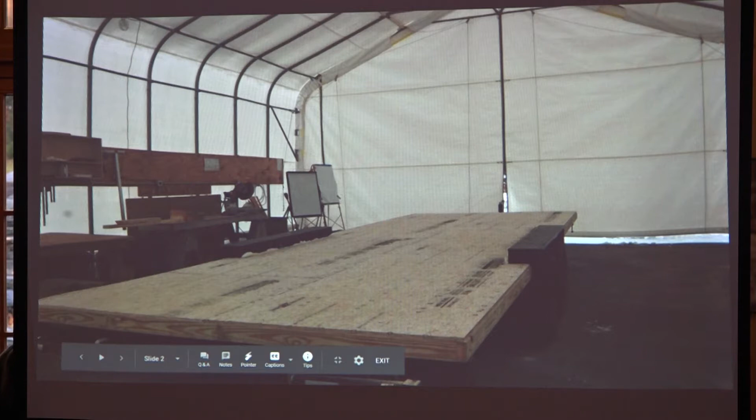And especially here in New England, where we're experiencing extreme weather conditions outside and trying to maintain a comfortable environment inside, we have this transfer of warm and cold meeting one another and creating condensation on some of these solid surfaces. So we do our best to insulate to try to separate those two environments.

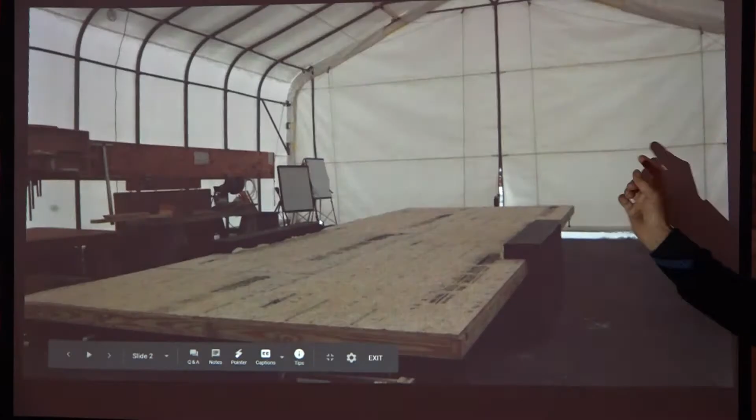This is a trailer of a most recent project that we did that was, in my opinion, very well designed to support a tiny house, based on the way that this flange, I don't really have a cursor, this flange is going to support our wall system all the way around the building. There's a 5.5-inch cavity that we put a pressure-treated floor system in, and we used a rock wool insulation that is capable of handling moisture, because it's going to get in there. There's really no way to keep it out.

It's a natural occurrence. So we try to think through this process, trying to keep as much water out as we can with flashing and adhesives, so on and so forth. But we also have to plan that just being in the environment, being in the atmosphere, you're going to experience some condensation. So we like to use materials that are able to deal with that moisture and allow it to release over time and won't create things like mold.

Real quick, one fun fact I like to throw at people about what it means to build on a trailer. What's the first thing that a tiny house on a trailer will experience the day it's born? Like a half-hour earthquake and a half-hour hurricane, right? Because that thing is traveling down the road. That's asking a lot of a building.

And there are often going to be considerations not only in the trailer itself, but in the whole structure, that are going to look atypical to what we think of when we build houses that aren't built on trailers. So I want to plant that seed: get ready to forget everything you thought you knew about building, because we're on a trailer now. Yeah, what's up next?

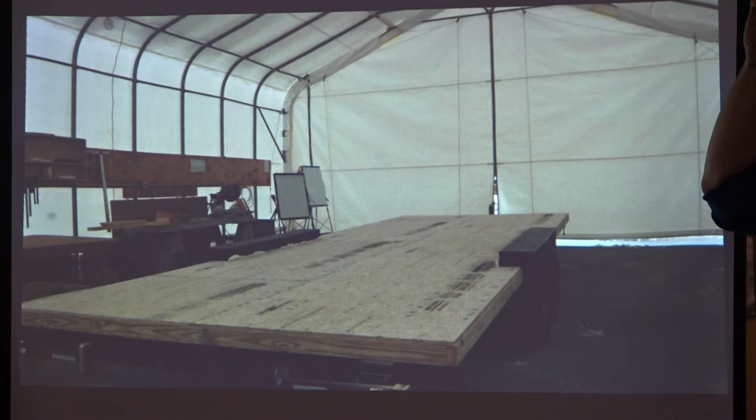So before we start building and just putting our wall directly on that thing that has minus 14 degrees on the underside of it, maybe we build, like we saw in the first slide, a deck right on top. Can you zip back real quick? Yeah. See, and there's one of those square fenders I was telling you about. But by building this up, we have broken the thermal bridge. There's a lot of framing in there for sure, which isn't stellar if that's your goal. But it's more than nothing, and nothing did not do much for us. So on top of that, we'd be framing up our wall, and now we have a little bit more of a thermal break.

Now, one thing I wanted to point out: this trailer sat outside. Although it was brand new and hadn't been built on yet, it sat out for a little bit. People were storing some things on it and it got a few scratches. Get yourself a can of Rust-Oleum and go around and hit up those little scratches, because that moisture over time is going to get in there. It will create rust and it will rot from the inside out if you're not careful. So spend a few minutes with a spray can, cover anywhere we marked it up with a little spray paint, and you can continue on with your building.

One of the things that was unique about this trailer is that our floor system could sit completely inside the trailer, be insulated, and bolted through these little holes you see on the side to the tube steel, making that floor structure completely connected all the way around to our trailer. Our flange system was separate, but we included that same styrofoam layer up the sides.

No, I guess I didn't capture that.

So it's just simply a thermal break. You're going to get wind and air flowing underneath your trailer, so it's important that you try to put as much insulation in there as possible. In this case, we had 5.5 inches of space.

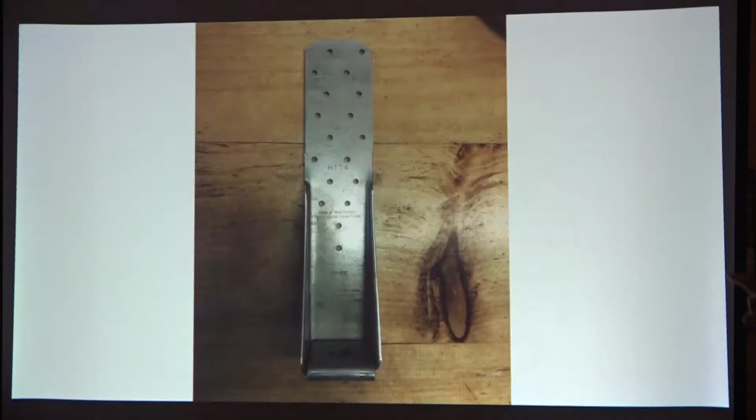One of the things about building around these fenders is that on your typical house, you have a bottom plate and a top plate tying to your foundation, which ties the wall to your top plate, which holds onto your rafters, and so on. They all overlap one another. When you have to build around these fenders, you are interrupting that bottom plate and the structural integrity of the bottom of that wall. So you have to plan ahead for that.

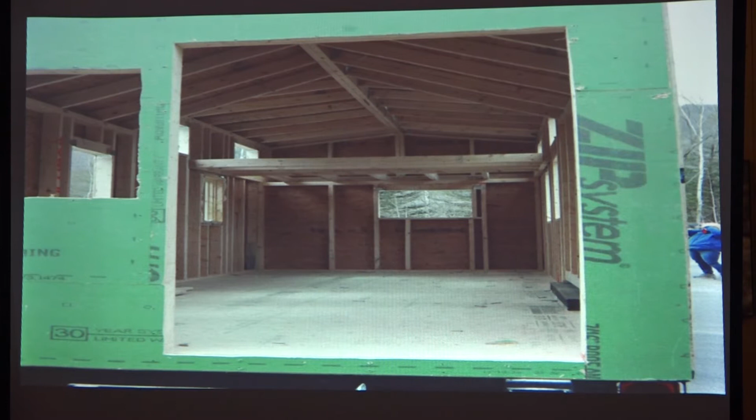Where we make that break, you can see in this slide, we've put in a header, which supports the weight of the rafter structure above, because we can't build off those fenders. Those aren't structural. They're there to keep water from blowing up into your structure, protecting whatever you have on that trailer. So we're not putting any weight on there, we're just building around it. We carry that weight over top of the fender, and then we use some really sexy components to connect your walls to this trailer.

This is a Simpson HTT4 hold-down bracket. It's pretty basic, only about 20 bucks. We put 1 in all 4 corners, and then 1 on each side of the fender, so actually 8 in every trailer. We'll drill a hole through the floor system, through the trailer.

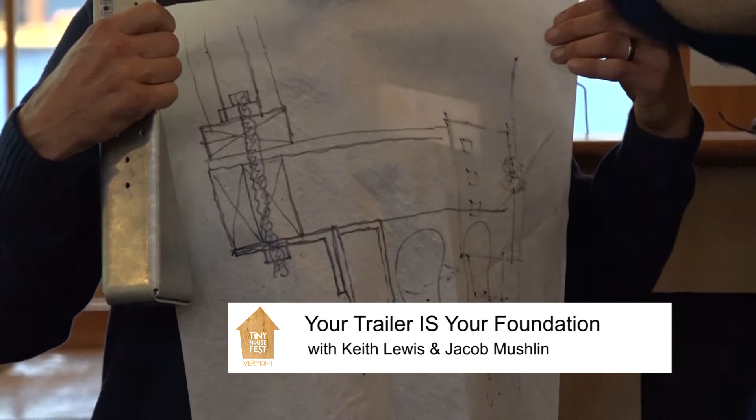There we go. So way over here, that's the flange we were talking about, that L of metal that hangs out into space. This rectangle is that rigid 2x5 tube steel. That's really the structural integrity of the frame itself. Built on top of that is the deck that we frame on. That's so when it's minus 15 degrees out here, that cold has a little more of a path to take before it gets into living space up here.

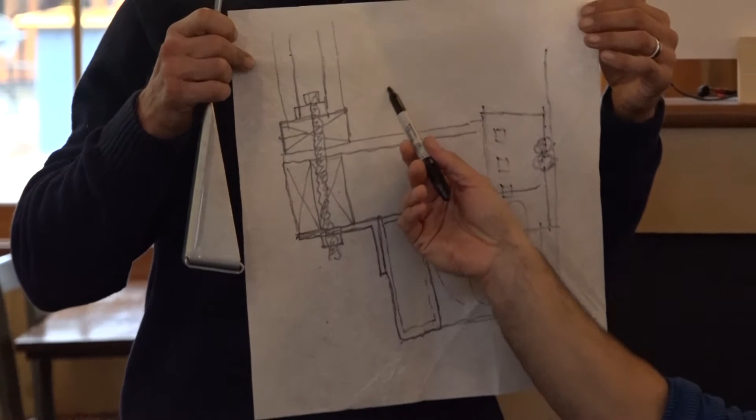Does that make sense? Now on top of that, just like any old platform, we're framing with a bottom plate like Keith said, and there's a stud. And this handsome devil right here is that piece of metal. You can see it has a bolt through a hole that goes all the livelong day, even through that flange. And now you have what we'd call a very positive connection between the walls of your building, the floor of your building, and the foundation of your building, which in this case happens to be a trailer.

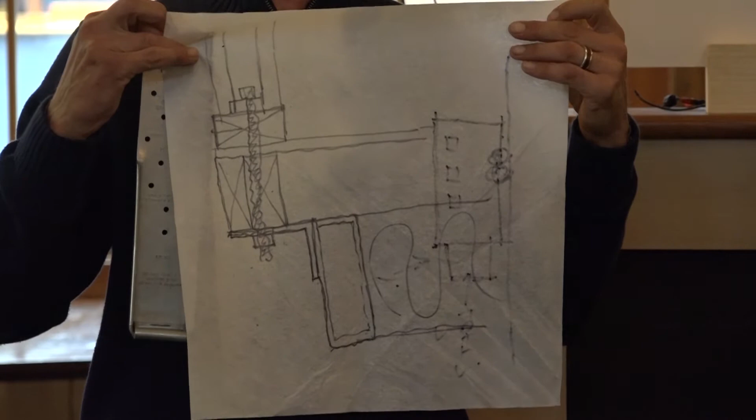Yeah, it's pretty sweet. What do you call that piece again? This is called a hold-down bracket or a tie-down bracket. So Simpson is a company that makes all sorts of different kinds of hangers and fasteners to help us connect wood to wood or wood to other metal components. And what that's doing is giving us more connection between our wood members and our trailer.

What I like to call it is really sleep insurance, because as I build for other people, these are the types of things I worry about. So going back to what Jacob said, your building, as you move it from site to site, is experiencing both hurricane and earthquake conditions. So if you're driving 65 miles an hour down the expressway and you have a headwind of 65 and you get a gust of wind of 40 miles an hour, you're somewhere between a Category 1 and a Category 2 hurricane. I see there's a question here.

So the question that was asked was how much insulation did we put underneath our wood floor deck system? We only used a 1/2 inch for a thermal break. All we're trying to do is create a continuous break between that insulation. So we like to use a rigid foam, something that's dense and can take some weight. This is really just kind of like, how could I say? It's more like the sheet in your bed is the first layer over top, and then we're going to add layers for actual warmth. So in our floor system, we have additional layers of insulation that we added to this system.

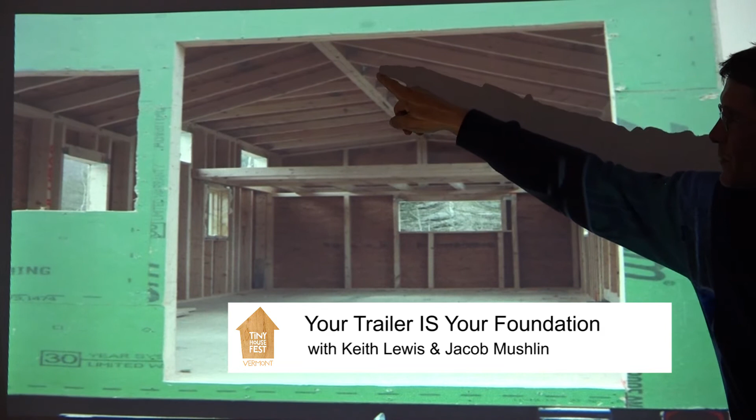Do you have any other slides? So, some cuties. This shows some of the locations. You can't see it very well, but in the corner we have a hold down bracket here. You'll see up top, we're talking about these Simpson joist hangers, rafter hangers, or hurricane ties. You can see up in this window, you'll see a metal bracket in the wood corners.

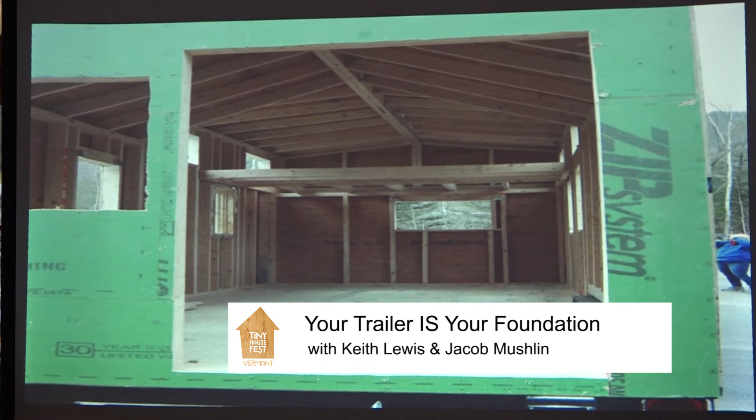When we have very large window openings, we don't want to rely on just our nails, especially in travel, so we use these header brackets that will grab onto the stud and onto the header that's holding up the weight. And the reason we do that is that windows are not necessarily structural. They're not holding your building together. They're just separating these environments. So we like to go above and beyond for that sleep insurance, adding these brackets in so that when this thing travels down the road, it's going to still be in one piece when we get to the other end.

And I'm going to make the decision to confuse you a little bit right now. So we talked about thermal bridging and how we want to cut down on that to keep the cold further away from the inside. However, every stud, every piece of wood that touches the outside of your wall and the inside, that's also a thermal bridge. The insulation cavity, the void in between those studs, that's what you want. So you'll often try to minimize framing.

Some folks call it advanced framing. Really, I think of it as framing 24 inches on center rather than 16 inches on center. And if none of that meant anything to you, you're in the majority, don't sweat it. But things like this bracket are one of the tools that we implement to be able to do that advanced framing in order to cut down on the thermal bridging of a wall. Oh, great. Yeah, we got that. So we can see, right there is one of these handsome little devils.

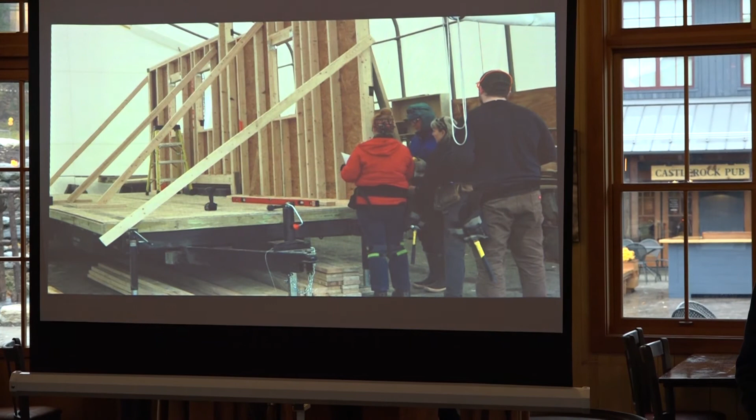And that's saving us 1 or 2 vertical studs in that wall that otherwise would need to be there as a shelf to support the structural header on which it would rest.

We have about 5 minutes left. I'm totally open to taking questions unless Keith has a very important thing he wants to add.

One important thing I want to add is, at the end of the day, what is it you're going to be leveling your structure out with? These jacks that are fastened already, welded to the trailer. This is a cylinder-style crank jack. You've seen different ones looking around some of these trailers. There's a scissor lift jack, like when you're fixing your car, it's got the little scissor one that folds flat.

These are really important when you're buying a trailer. That's one of the first things I would look at: what is going to be leveling this trailer out and really holding it up and keeping it stable over the time that you're spending living in it. In some cases, if it's going to be in a permanent location, I'd go as far as to maybe pour a concrete slab, put an anchor in it so I can actually anchor my trailer to something else.

That was really the only other thing I wanted to point out as far as trailers go, other than make sure that you understand the weight of your trailer, how much that trailer can hold. Those things are really important, especially if you're getting creative and you find some reclaimed piece of granite slab you want to put in your kitchen. You've got to think about weight and make sure that your foundation is designed to hold that structure that you end up with in the end. And from there, I suppose we could go to some questions if you're interested.